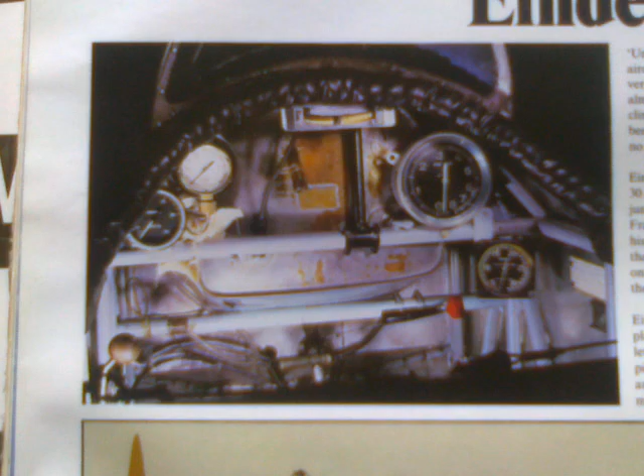And it was up against the wicked, evil, dreaded Fokker Eindecker E1, and then the E2 and the E3. But it was the E1 that first annoyed them all, with synchronised guns. But it had wing warping, and it was kind of brutally simple. This is a modern reproduction, and it's got a stationary engine under that cowling. And it's also, as you can see, got ailerons.

It's got landing wires which are fixed. They don't twist the wing.

I've just found another account of somebody on their first acquaintance with a Morane. So you just watch that while we listen to what a fella called Willie Fry had to say.

The flight commander, Captain Eustace Grenfell, black-haired and glowering, had done a tour in France with No. 1 Squadron, going out with it from England and winning an MC and Bar military cross. After luncheon, Grenfell had a Morane wheeled out and ordered me to take it up, fly it around for a time and make 3 landings, adding, 'and I hope you break your bloody neck.' As I soon learned, he meant no harm by this. It was just his way of being casual, though disconcerting to a terrified young pilot.

Morane bullets were very small, so light they could not have weighed more than 10 hundredweight. Now, a hundredweight is 112 pounds, so we're talking half a ton, engine and all, that one man could lift one up by a tail skid and wheel it in or out of the hangar. It had a round fuselage with a large spinner painted red on the nose attached to the propeller boss and the propeller. The spinner had a splendid streamlining effect and made the machine look exactly like an unlit cigar with 2 small wings attached. But the effect of the spinner was that only the cylinder heads of the engine received a direct stream of air for cooling.

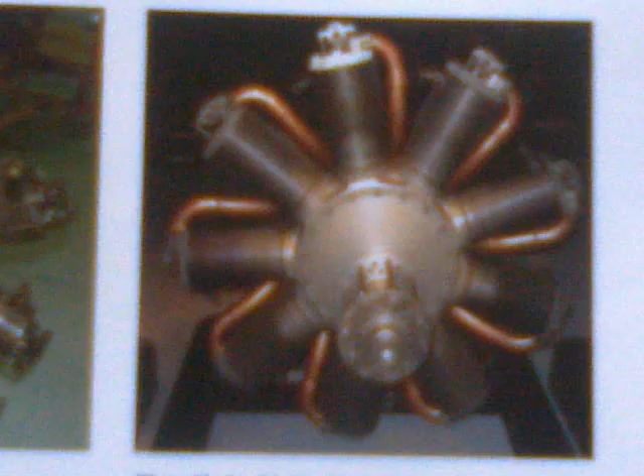Meanwhile, the 110 horsepower Le Rhône 9J engine, as seen here, became preferred to the Clerget, delivering better performance despite its lower horsepower rating. This was significantly improved when the square tip Lang propeller, i.e. that one, which would have had quite a lot of tip drag from that big flat paddle blade, was replaced by the coarser pitch AD644 style of propeller. This configuration soon became standard.

Number 44 Home Defence Squadron was officially formed on 24 July 1917 under Major T.O.B. Hubbard, Military Cross, at the 100-acre Hainault Farm Aerodrome, its base throughout the war. Although the Camel was delivered in quantities to the Royal Naval Air Service, Number 44 was described by DVA as, quote, the first Sopwith Camel squadron in the RFC, which we may take to mean that it was the first to be wholly Camel equipped.

For the record, number 70 squadron in France received a very early delivery on the 29th of June, but their remaining machines arrived only at the end of July.

Designed to replace its predecessor the Pup, whose single Vickers machine gun was susceptible to freezing at high altitudes, the Camel acquired its typically frivolous nickname from the metal fairing that protected its gun breeches against this problem, producing a hump in front of the cockpit.

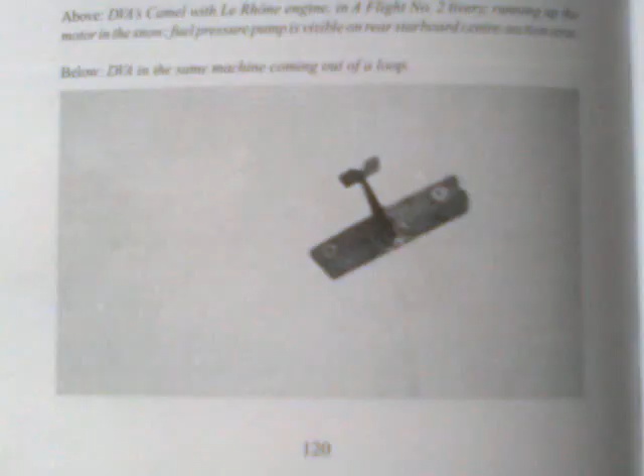That one's captioned 'DVA in the same machine coming out of a loop,' with the 110 horsepower Le Rhone 9J, which then became the standard power plant at this time, with numbers of machines being converted at a unit level. It appears from these photographs that this particular machine's cowling was not factory produced for the Le Rhone 9J, and on the portside view, there appears to be a Sopwith Company serial box visible in the legs of the airman at the tail. So although the number is not visible, this may well have been B3826 refitted.

A useful clue as to the date is provided by the snow. Flying would have continued throughout a fairly mild and dry November-December in the southeast, with periods of light snowfall in the third week of December.

Only in the first two weeks of January 1918 was there a wintry spell with heavy snow, which would have kept most aircraft hangared. From our point of view, in an age of inline and occasionally radial engines in light aircraft, the rotary is a rare and exotic bird. It may not be immediately apparent what the pilot of a rotary engine had to contend with.

Okay, rather than read all that stuff again, go back and have a bit of a contemplation session with video number 2 and video number 3. That's where we got right into how to operate rotary engines. We also covered a fair bit of it in video number 4, Pilot's Accounts with Flying Camels.

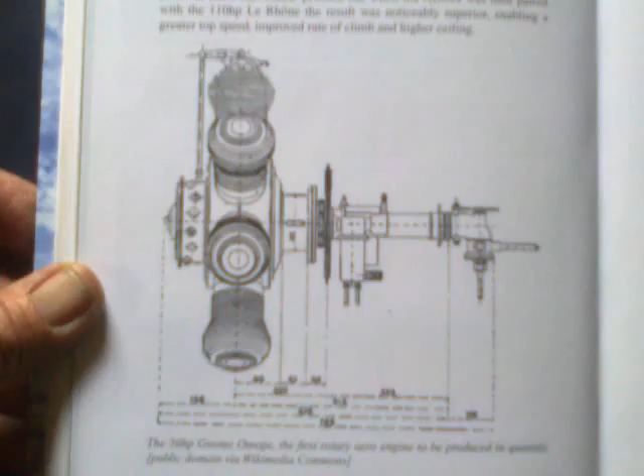We will have a little bit of a diversion to have a look at this, which is a picture of a 50 horsepower Gnome Omega, one of the first rotary aero engines to be produced in quantity.

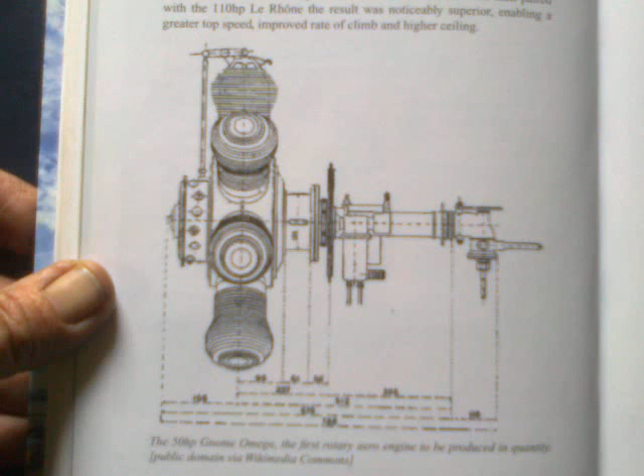Air comes in here, mixes with fuel, goes through the hollow crankshaft, goes into the crankcase, and these ones had a really interesting variation. They had a spring-loaded poppet valve in the crown of the piston. Under compression and under a power stroke, the pressure in the cylinder kept the poppet valve closed. During an intake stroke, the poppet valve opened and it permitted fuel-air mix to be sucked through the centre of the piston.

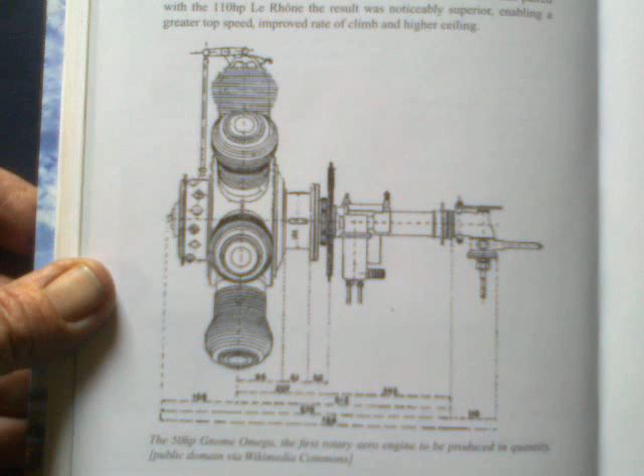Anytime the poppet valve got stuck, then on a power stroke, the spark plug ignited the mixture. The mixture would then fire down through the stuck poppet valve and come back out and blow out through the carburettor. That's why they had the downward angle on the air intake, so that it would blow the flame down rather than directly into the pilot's groin.

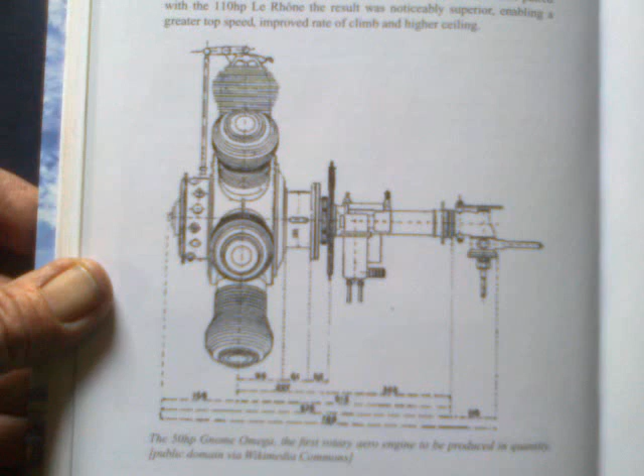They were smooth, they were light, they were powerful. They were better than a stationary engine when they came onto the market.

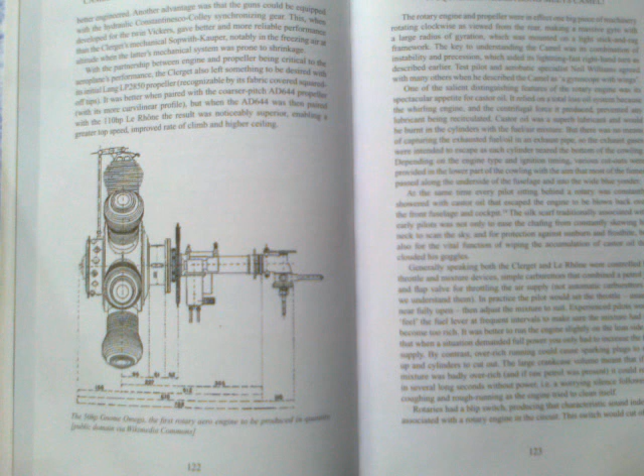Therefore, people loved them. With the partnership between engine and propeller being critical to the aeroplane's performance, the Clerget also left something to be desired with its initial Lang LP2850 propeller, recognisable by its fabric-covered square tips. It was better when paired with the coarser pitch AD644 propeller with its more curvilinear profile.

When the AD644 was then paired with the 110 horsepower Le Rhône, the result was noticeably superior, enabling a greater top speed from the coarser pitch, and improved rate of climb, because the 110 horsepower engine is lighter than the 130 horsepower engine, plus a higher ceiling.

The rotary engine and propeller were in effect one big piece of machinery rotating clockwise as viewed from the rear, making a massive gyro with a large radius of gyration, which was mounted on a light stick and rag framework.

The key to understanding the Camel was its combination of instability and precession, which aided its lightning-fast right-hand turn, as described earlier. Test pilot and aerobatic specialist Neil Williams agreed with many others when he described the Camel as a gyroscope with wings.

Then they basically go on to talk about how much castor oil it used, and describe how to run the throttle. We've already been through that in the earlier videos.

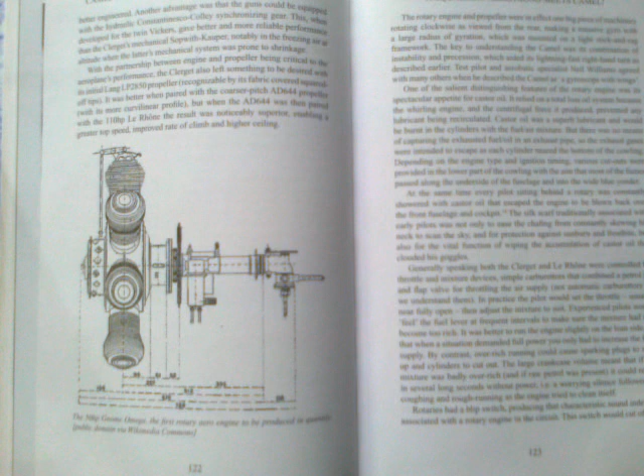Okay, reading from here. Eventually, B-3826 passed into the capable hands of red-headed Charlie Banks, inevitably known as Sandy, whose trick flying was rated by Cecil Lewis alongside DVA's as the best ever seen during the war. Banks was one of a 44 squadron group who one day, after a well-oiled lunch, voted that DVA should lead them in an aerial tail chase over the English countryside. Lewis described them as taking off in all directions.

The President, on a mess visit to Stratford, had purchased a keg of old ale. When he got back with the spoils in a tender, it was just on lunchtime, so we all turned out to roll the barrel into the mess. The ale was broached and gushed out dark, mellow, and extremely intoxicating. The entire squadron voted it necessary to drink the mess president's health with two glasses apiece, and then one more for luck. Lunch became hilarious and finally rowdy. We were certainly not sober, but we were certainly not drunk. We were merely in excellent spirits.

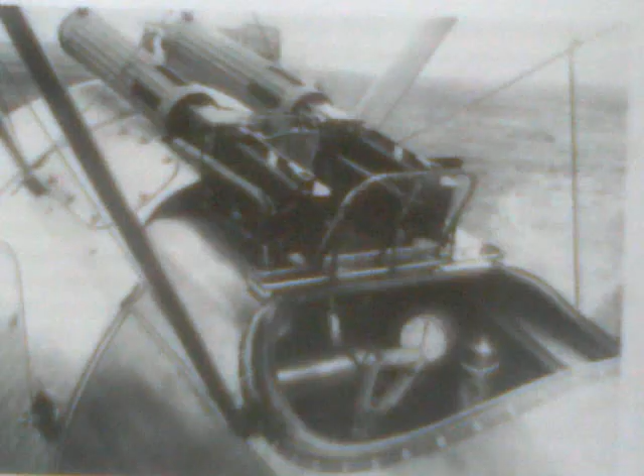Without going into it too far, there's pretty good evidence to indicate that Durban Victor Armstrong was the first person to invent the slow roll, or the aileron roll, as opposed to the flick, snap, or barrel roll, which was the only way to roll an aeroplane that anybody had invented or discovered before Armstrong came along. I could get deeply into all that, but I choose not to.

Now the camel had a 28-foot 6-inch wingspan. The gap was 39 feet. 28 foot 6, 39 - he had 5.5 feet, 1.5 meters, not 2 meters, between each wingtip and the wingtips of the camels he was flying between.